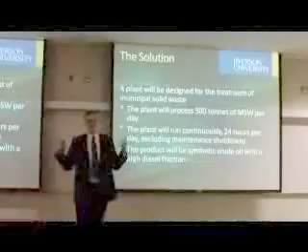See, the problem is that we currently view municipal solid waste as a burden, something that needs to be collected, hidden away, swept under the carpet, and buried. This needs to change. Instead, what we need to do is start viewing our municipal solid waste as a resource, something that we can take and from this produce a valuable and saleable product. And here comes our solution. It will be to take this municipal solid waste, 500 tons per day, and from this produce synthetic diesel.

We'll be producing a synthetic crude oil with a high diesel fraction. We'll be running 24 hours a day, 7 days a week, year long, except for the necessary maintenance periods. And for the conversion of municipal solid

Biological process is a process used in the production of biofuels. For example, ethanol. This can be produced through the fermentation of corn, beets, and sugarcane. Another prime example, methane. Through anaerobic digestion, we can produce methane. As you can see from the following example, the biomass feed is uniform. By that I mean homogeneous.

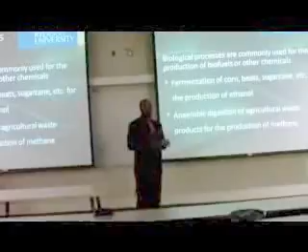Unfortunately, the municipal solid waste we're dealing with is extremely heterogeneous. It contains organic and inorganic waste and other possible harmful contaminants. For this reason, this process will not be ideal for our project. Which brings us to the next process, the extractive process.

This is usually used in the removal of desirable compounds from plant materials. For example, we can extract linseed oil from flaxseed, peanut oil from peanuts. For the same reason as the biological process, this will not work due to the fact that, as you can see also from the example, the biomass feed is also homogeneous.

Which brings us to our last and preferred option, the thermal treatment. The thermal treatment is a very versatile option in terms of having consistent product, regardless of the feed, whether it's homogeneous or heterogeneous. The type of thermal treatment we're talking about today is gasification.

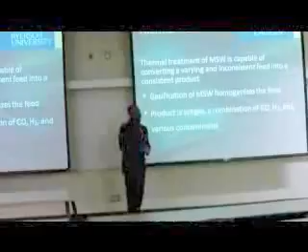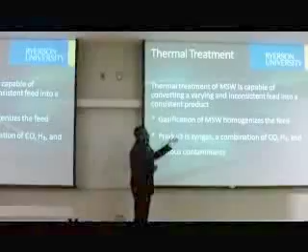Gasification is a process whereby solid is heated either directly or indirectly for the purpose of vaporizing volatile content in the feed. The solid we'll be dealing with today will be the municipal solid waste, and the volatile components will be the syngas. The primary constituent of the syngas will be carbon monoxide and hydrogen gas. Now, to talk about the different types of gasification, I call my colleague Mr. Samuel Poyer.

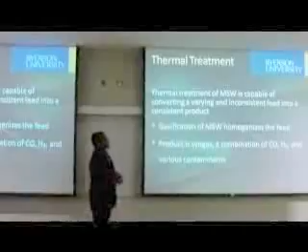So the first type of gasification that we considered was the conventional steam gasification. These processes usually operate around 600 to 1,000 degrees Celsius, and energy is supplied either directly or indirectly. The direct energy supply uses the partial combustion of a fuel, for example, natural gas or coal, and the indirect energy supply is through superheated carrier gas, in this case steam, which is then sent to the

Depending on the degree of pretreatment, conventional gasification achieves conversion of the MSW to gaseous effluents in the range of about 60 to 90%, where 65% of the gaseous effluents are syngas, so stuff we're actually after. The 10 to 40% of the MSW that is not gasified remains as a solid char that requires a significant amount of treatment before it can be disposed of.

The second type is plasma gasification. And I'll start off by explaining that plasma is commonly conceived as the fourth state of matter that comes about when a very large amount of energy is supplied to the gas. This large amount of energy allows the electrons and nucleus of the gas molecule to actually

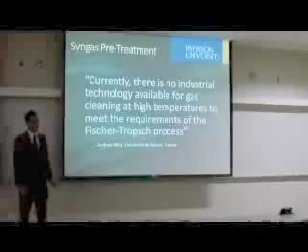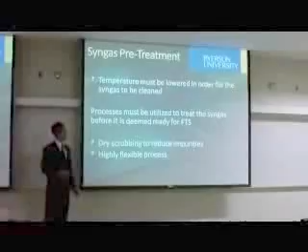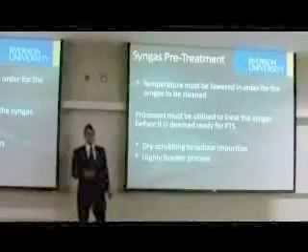One of the methods that we most normally looked at is the two-stage dry scrubbing process by Westinghouse Power Corporation, also known as the ultra-clean syngas polishing process, in which a two-stage dry scrubbing process is utilized to decrease the concentrations of these impurities that damage the catalyst that we need. Also, water quenching can reduce other impurities such as ammonia.

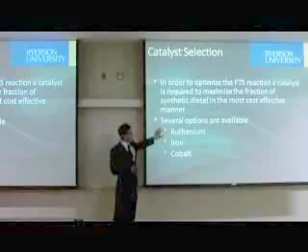So now we must select the catalyst to facilitate the Fischer-Tropsch synthesis. We select 3 catalysts to compare: ruthenium, iron, and cobalt. Ruthenium is an excellent catalyst, has excellent selectivity, and has excellent properties as a catalyst to produce crude oil with high diesel fraction. However, it costs $4,000 a kilogram, making it very cost prohibitive. Iron, on the other hand, is very inexpensive. However, it mainly produces C1 to C4, methane to butane, which is not desirable for petroleum. Lastly, we will examine cobalt.

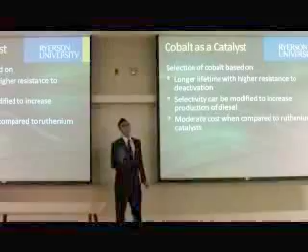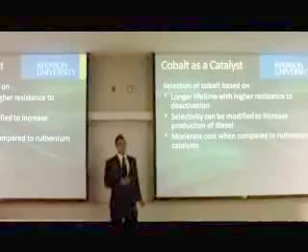We decided to select cobalt based on the following properties. Shell has reported that their cobalt catalyst has lasted up to 5 years. However, other companies such as Sasol have reported several thousand hours of usage. Also, this catalyst produces the correct carbon number, C12 to C18, which is required for crude oil with a high diesel fraction. And lastly, it is moderately priced when compared to ruthenium.

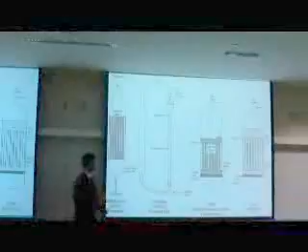So now we can select a vessel to house the Fischer-Tropsch synthesis. We will compare the vessels based on 3 qualities: the quantity of the hydrocarbons produced, the quality of the hydrocarbons produced, and the compatibility of the catalyst. So here are the 4 vessels capable of housing the Fischer-Tropsch synthesis. To the left here we have a multi-tubular reactor. This reactor can have 2,000 up to 5,000 tubes in it.

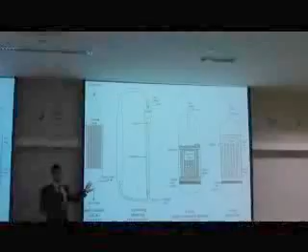As can be seen by these sheer numbers, it is very hard to remove and change the catalyst with the sheer number of tubes. Other issues such as fouling can arise, making maintenance costs and capital costs extremely high, making this vessel undesirable. Next, we have the circulating fluidized bed reactor.

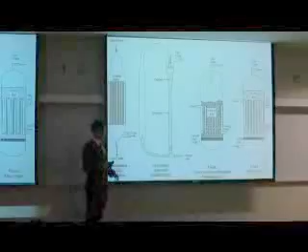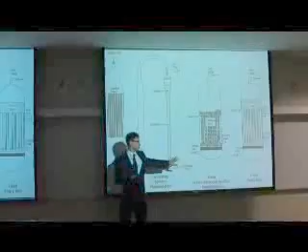Again, low productivity, low capacity, not what we need for this project. This reactor was later replaced by the fixed fluidized bed reactor, which is commonly used in the industry today. However, this reactor mainly works with iron. And iron, as I mentioned previously, produces C1 to C4, methane to butane, not what we need for this project. Therefore, we have selected the slurry bubble column.

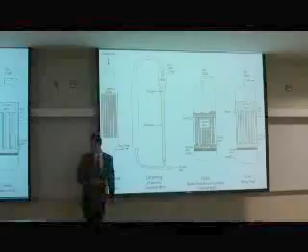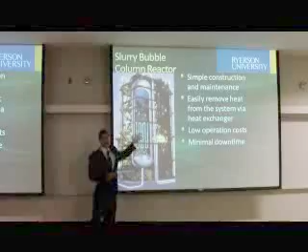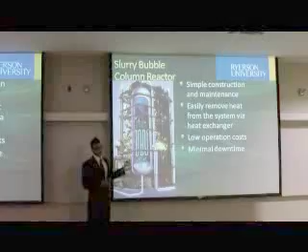So what is a slurry bubble column reactor? Well, the slurry bubble column reactor is a vessel in which there's a slurry inside the vessel with a catalyst suspended within it. And the gases bubble through from the bottom, making a 3-phase reactor: gas, liquid, solid. We decided to select this reactor for its thermal superiority compared to the other vessels, because the Fischer-Tropsch synthesis reaction is very exothermic.

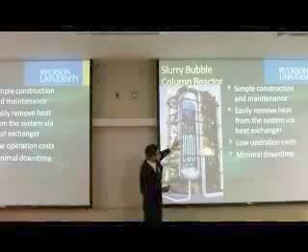With a submerged heat exchanger inside the vessel, this addresses the issue of hot spotting, because hot spotting can deactivate and destroy the catalyst required for the Fischer-Tropsch synthesis. Also, having the heat exchanger inside the slurry creates a uniform temperature. Also, this vessel takes smaller sized catalyst particles from 10 micrometers up to 200 micrometers. However, the desired range is 10 to 75 micrometers.

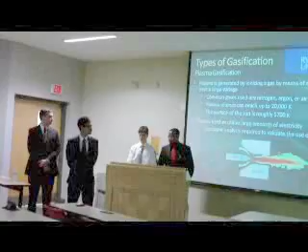Did you get the idea that you don't need pre-treatment for plasma? From the plasma gasification waste destruction facilities on the subsequent slide, one of the things they always stress in articles is that there's absolutely no pre-treatment required. Your project is for Toronto, right? Yes. Okay. Just imagine what you have in the waste.

You don't need pre-treatment? No, it comes right off the truck, so it's not like we're getting couches and televisions. It's pre-shredded and pre-compressed. So there's a pre-treatment. Well, we're not doing any pre-treatment. Pre-treatment is done in the truck, at collection of municipal solid waste. We wouldn't have to pay for it. What do you do with the battery? I'm sorry? What do you do with the battery?

I believe that they would end up contributing to the acid gases that we need to clean up. No, just a regular battery. Alkaline battery. Or mercury battery. I believe they'd become a part of our vitrified slag. It's a non-leaching product. So you need pre-treatment, because in Toronto there is no plant to separate the battery.

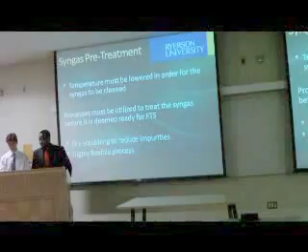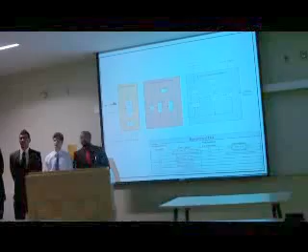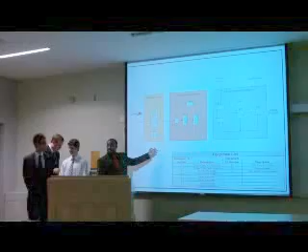Your reactor R1 is working at 1400 degrees centigrade? We're not entirely sure of the exact temperature, but typical gasifier temperature is about 1500 degrees Celsius. How much? 1500 degrees Celsius. And your solid or molten material is coming from the reactor at 1500 degrees centigrade, and you cool it with water? Could you answer that? Yes, sir. Is that your answer? Sorry, the question was the solid coming out? Yeah, the solid coming in at 1500 degrees centigrade.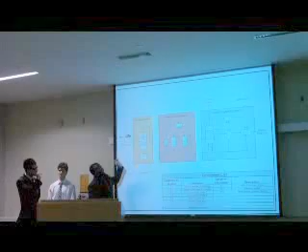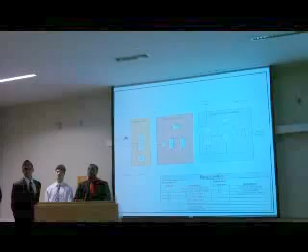Actually, the molten material coming from your plasma gasifier is 1500 degrees centigrade? I would assume so, due to the temperature that's already there; that's why I assume it to be 1500. 90% of this is gas and the remaining 10% is molten. No, I'm just talking about the temperature. Temperature is 1500 degrees centigrade. Yes, sir. And it is 1500, and you're cooling with water? Sorry? You're cooling that heat exchanger with water?

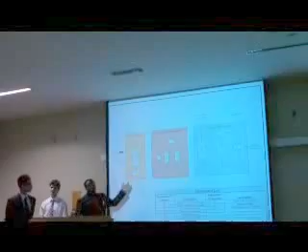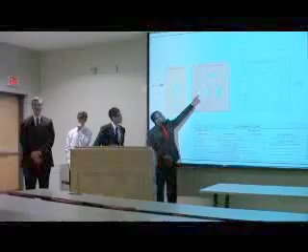Okay. So well, for the most part, when it goes through the heat exchanger, we use that in the turbine, which also can be used for electricity in other parts of the plant. Thank you.

What about cooling down with ice? You can go. In essence, you can now go. You could call the ice cream guy and you bring a few cubes of ice and we put it here. But that's it. There are options.

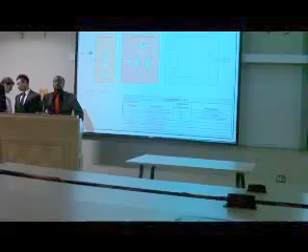Okay, I have a few questions. Let me see, Gafar, one of the things I want to know. Well, first I have to make an announcement. 25 years ago, I worked in Ontario Hydro in plasma. Ontario Hydro had so much electrical power energy that they didn't know what to do with it. So I worked in Evelyn Avenue here in Toronto.

And they wanted to use electricity because, as I said, they didn't know what to do with it. So they bet that they could be producing gas. Now, the final conclusion was that it was not economically viable. It makes a lot of sense. You don't have to be a genius. You get a little bit into some material balance, and finally the whole cycle of the thermodynamic efficiency, you find that.

So why, as I think it was Samuel who was talking about the applications, why are we using plasma in the literature? You were the one who was talking about the literature, is that right? Okay. So why does the literature bother to talk about plasma? I'm going to tell you, because Gaffer is not going to answer. Are you going to answer, Gaffer? Why have you been reading about plasma to obtain syngas from municipal waste? Why do they present this plasma torch, plasma reactor?

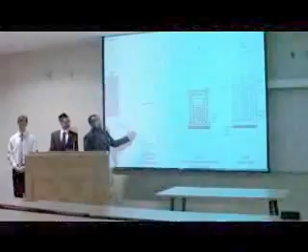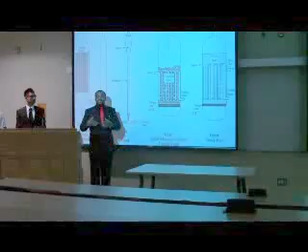Well, from the four designs there, this one is cost prohibitive because we have like almost 2,000 to 5,000 tubes. So cleaning and clearing out the catalysts is cost inefficient and also increases the maintenance time that we're trying to avoid. This one also has been replaced by the fixed fluidized bed. As my colleague said earlier, this works mainly with iron, and iron can produce C2 to C4, which is not the ideal diesel fraction that we need. Which brings us to this one, the last one, the slurry bed.

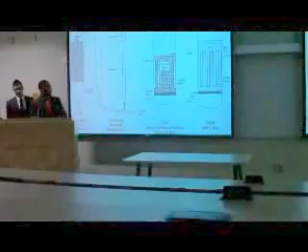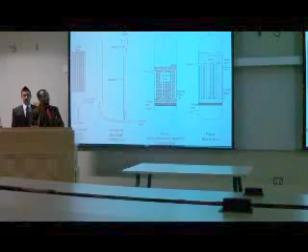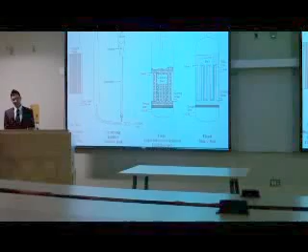No. I'm talking about circulating fluidized bed. Why did you discard that one? Why don't you use, for example, the Sasol process? You know the Sasol process, where is it used, or when it was used, or where it's coming from? The Sasol process that you have there. I didn't look much into it for the most part. As my colleague explained to me, this was later improved. Improved technology was later used. This was replaced.

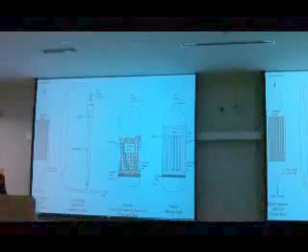I am talking about the circulating fluidized bed, why did you discard that? The circulating fluidized bed. I didn't look into it, so I cannot tell you something. Okay.

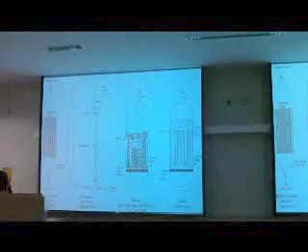Let me see. You guys have been talking, all of you, about syngas. When you apply the specific case of plasma, where you can achieve very high temperatures, as you mentioned, and this is theoretical, the syngas is okay when you are using it, for example, as they use in South Africa. In South Africa, they use the Sasol process to circumvent the apartheid problem with oil. But anyway, that's history. When we have time, we can have a coffee and talk a little more about it.

But the thing is that the syngas that you are talking about contains highly toxic substances, including dioxins, and at high temperatures, NOx. So it's not just the H2 and CO. That's nice. As I said, it's very cute. It's very good in the movies, but it contains very corrosive and toxic substances, and you have to go through other processes even to eliminate these byproducts. I am directing my questions to Gaffer.

Okay. Sir, from our previous research, like I said earlier, gasification is a process that converts organic waste into syngas. For this process, the waste materials are treated with high temperatures, with no combustion involved. No combustion means that there's very little or no oxygen. So the absence of oxygen pretty much reduces the presence of dioxins in the syngas components. And if there are, by any chance, they will be negligible.